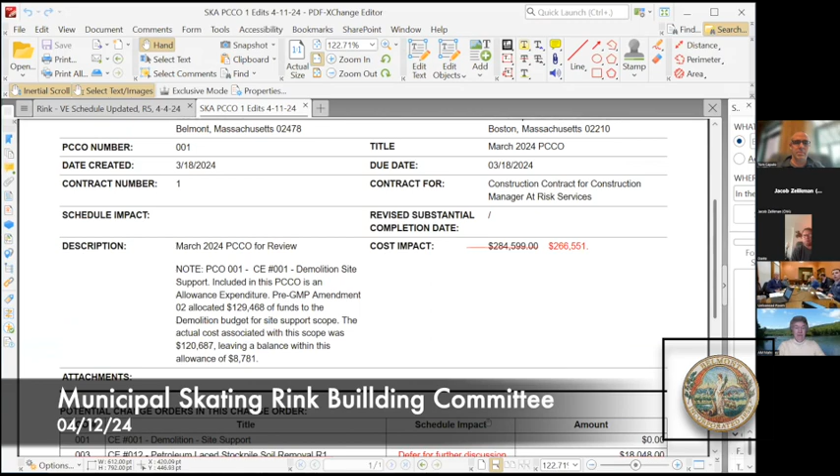All right, so I just described items 1 and 4 on the PCCO. Item 6 is where I'm going to go next, just to get the other ones off.

So this is what we've talked about for the additional abatement that's unforeseen. We've discussed in previous meetings that the rink slab itself, the actual ice surface and the concrete underneath it, the underside of that had a black mastic between that and the green insulation board. That was identified, tested, and determined to be hot, so we had to do a non-traditional work plan to remove that material.

So that material was all stockpiled separately. It was witnessed by a third-party hygienist. It was hauled off to a disposal facility and ticketed and documented. So essentially, the justification of this change order is...

...a pre-agreed upon unit rate that was included in the contract documents for the premium related to disposing ACM concrete, meaning asbestos-containing material, concrete that has to be removed as asbestos-containing material. So that's all a tonnage. This PCO is essentially the verified weights of the concrete disposed of as ACM multiplied by the previously agreed upon unit rate for disposal of concrete as ACM above and beyond the quantity that we were told to carry.

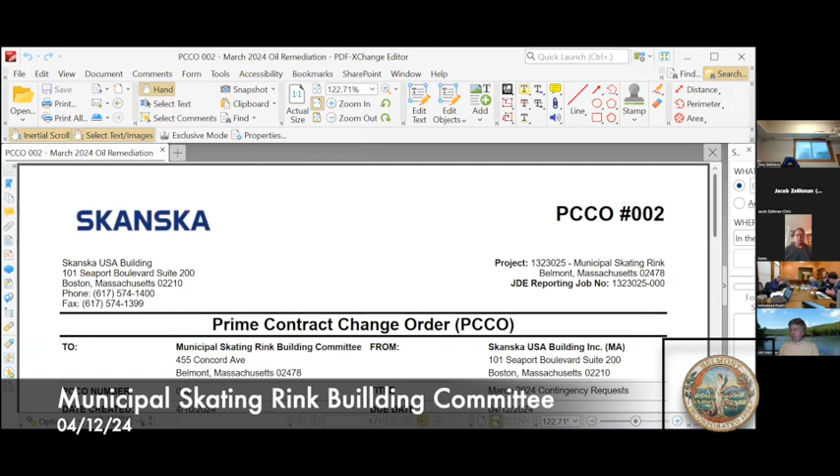Skanska and JDC have contributed to this, so it's not... we've heard your concerns and we understand, and we're looking to resolve this in the best way. And the town is part of it also, because the town is coming up and paying for the $18,000 of

soil disposal, correct, which is oil contaminated. And there was definitely old oil there in the trenches that we dug up. Yes, so the town has some responsibility also. We can get into the details in a future meeting, but that's a big part of it. When we were there digging, and I don't want to speak for the professionals that were there, but what I heard and what I witnessed was a black, thick, viscous oil.

And my understanding from the professionals that were there is that's oil that's been there for a while. That doesn't happen in a week, that doesn't happen in two weeks, that happens over a long period of time. And that's what we saw when we responded: the black viscous oil coming up through the slab. It wasn't red, new fuel oil. So that's why it's a little gray.

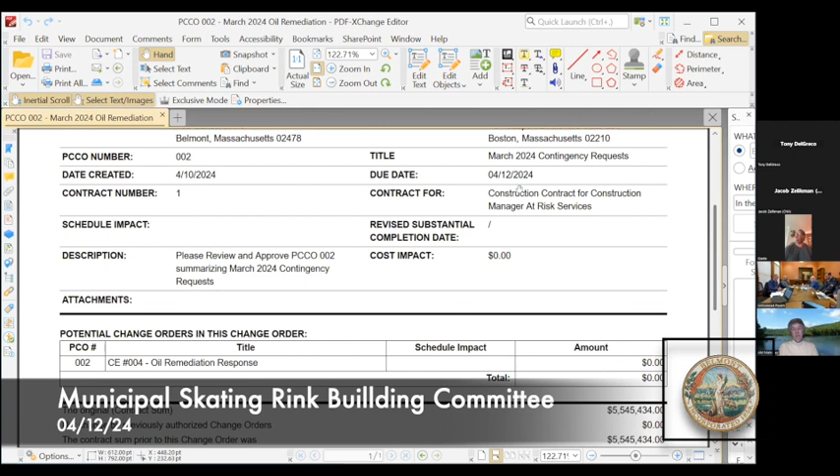However, we're looking forward to coming to some sort of agreement that's fair for everybody, and this was a first attempt to get there. So, well Mike, you're looking for... the town has absorbed $18,000 of it. And your recollection and my recollection of being at the site might be slightly different, but maybe we could talk about that in depth at another time.

I thought we were tabling this discussion, but since it's on the table... No, Dante, please, we are tabling this. I just wanted Mike to give an overview, and then we'll bring it up at our next meeting to approve a change or not approve it, all right? It was just giving the committee a summary of where we are at right now, all right?

Okay, sounds good. It's essentially the $80,000 of emergency response and the $18,000 of soil disposal, so we're at almost $100,000. Okay, so the discussion is tabled, correct? That is correct. Thank you.

Will not be a vote on that today. Mr. Shea, William Shea, does CHA recommend approval of this? Not at this point in time.

Okay, thank you, so that's tabled. Got it. All right, that's all we have for Skanska and billing today, correct, Mike? Yes. Okay, all right, so let's jump to the VE discussion.

Based on last week's meeting, we approved the color on the sides of the building, which is stripe. And TGAS is going to be creating drawings that show where those stripes are, the width of them, so that the pre-engineered metal building can be ordered.

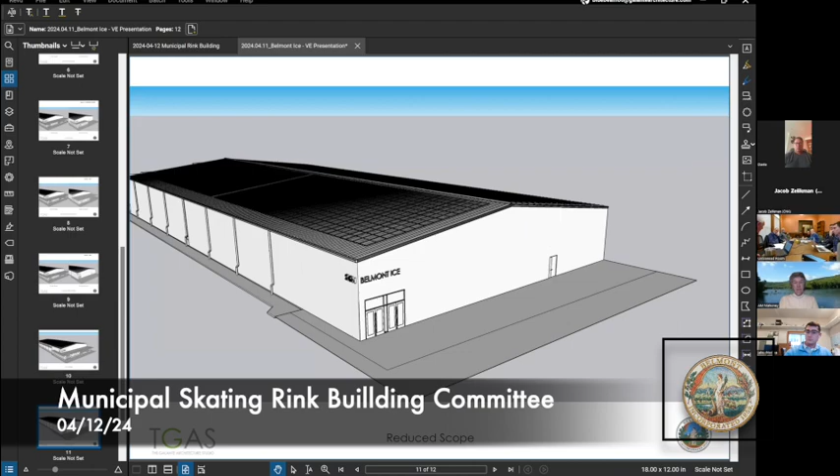I think Ted indicated those would be out imminently. The other is we have modified and defined where the metal building comes down. On three sides of the building, it's coming down at around 19 feet, 8 inches. That will be on the west, the north, and the east side, and a portion of the south side, which the south side being where the lobby is. Around the lobby will still remain as a block as opposed to the cement board.

And those drawings will be out the first next week so that Skanska can then finalize the buy for the building, because then the panel heights will be defined so you can buy it. Is that correct, Mike? Correct.

And in that, the transom windows on each side of the building, east and west, will be included based on the vote of the committee last week. And that will be shown on the drawings that TGAS will be producing.

And the third one that we approved was to keep the roof as galvalume color, in other words, not colored. And that will also be shown. I think LeMessurier will be providing drawings for the change in the concrete stem wall and the foundations for that to make this all happen, and that they were issuing that today.

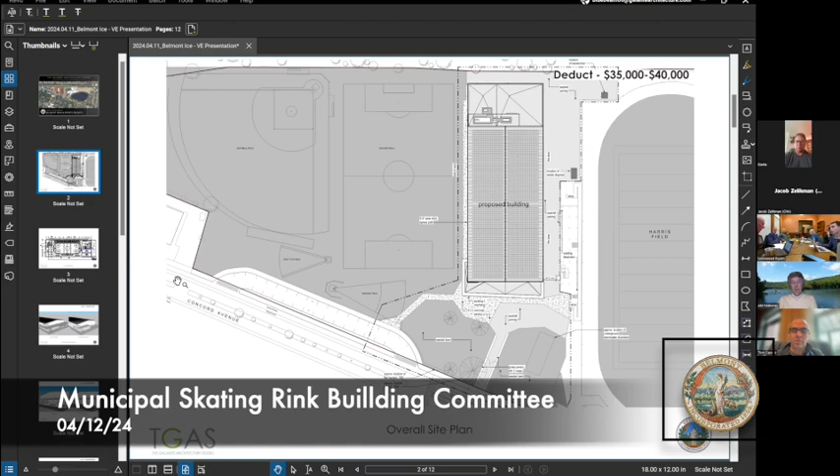Okay, any questions from the committee? Not hearing any? Okay, so now Dawn or Jake, can you bring up the list of other VE items? Ted is sharing. Ted's got it, and then we'll turn it over to Ted.

Good morning, everyone. So we have continued discussions on value engineering, and any decisions we can make will help move the project forward in any way possible.

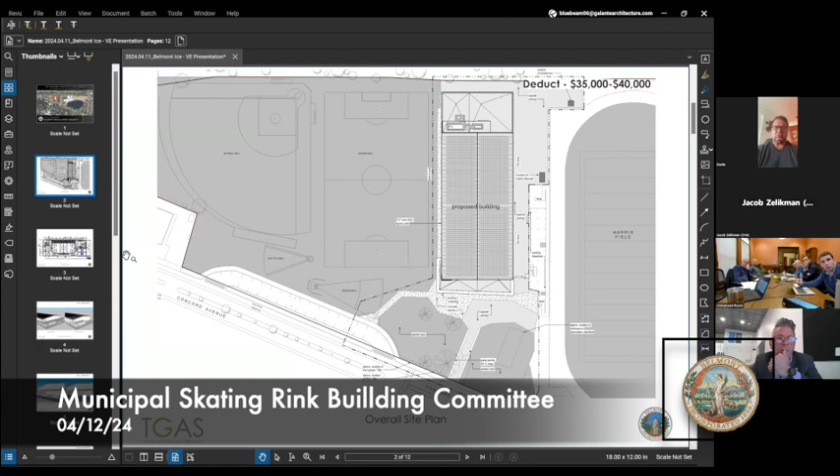The site plan, as we know, shows the building sitting on the site. Here's the floor plan of the overall building. One possible removal is to take the canopy, the roof, the arcade, over to the right side of the building, off the building, and reduce the scope that way, just having the lobby stay on its own.

And that, I understand, is a $35,000 to $40,000 reduction. We have another version, which is to remove the knee wall that is used as a protective barrier from the automotive traffic and pedestrian traffic out here, and that defines the arcade. That's another $20,000 to $25,000 reduction.

This is really just removing the canopy overhang. It's very subtle in the drawing here, would make a significant difference in the building, but there's no canopy overhang on this portion of the reduced scope, and there is a canopy overhang on this portion. Again, a couple hundred thousand dollar reduction, it seems.

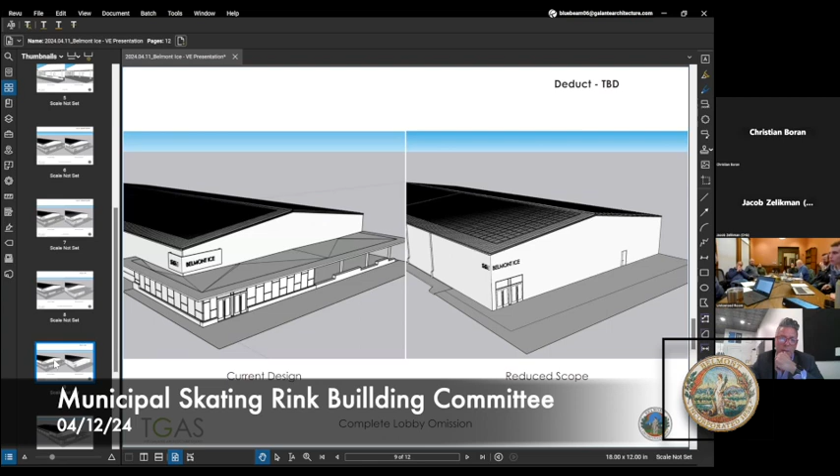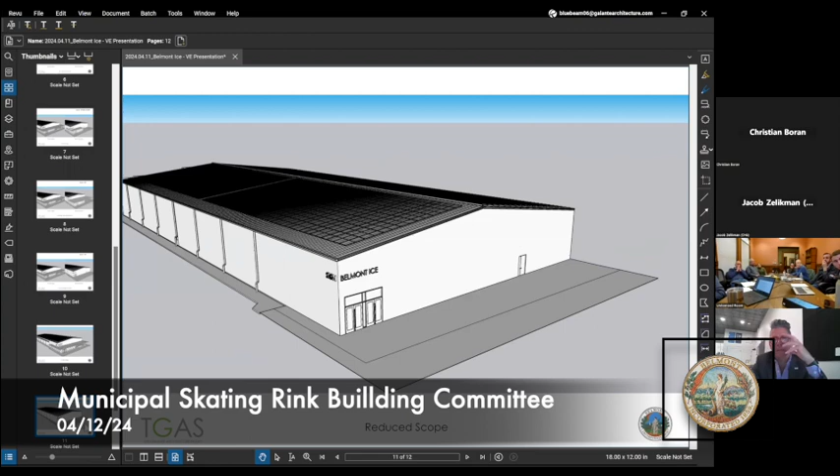Removing the entire lobby is another option, and we're still trying to sort out the value of that item as well. So the current design is looking like this, with some architectural articulation, breaking up the massing and the scale, having some portions open, some portions enclosed, glass and metal. There's a number of thoughts that have gone into that. And the proposed design would be to remove some of those things and reduce the scope.

Okay, so Ted, can I take over from here? Sure. So from the committee standpoint, I don't expect us to come to a conclusion on any of these because we don't have an overall cost number yet. In summary, the independent cost estimate is due today. Skanska and TGAS will reconcile those numbers or costs next Thursday and Friday. The committee will then meet on the 24th, 25th, and potentially the 26th to go through those numbers.

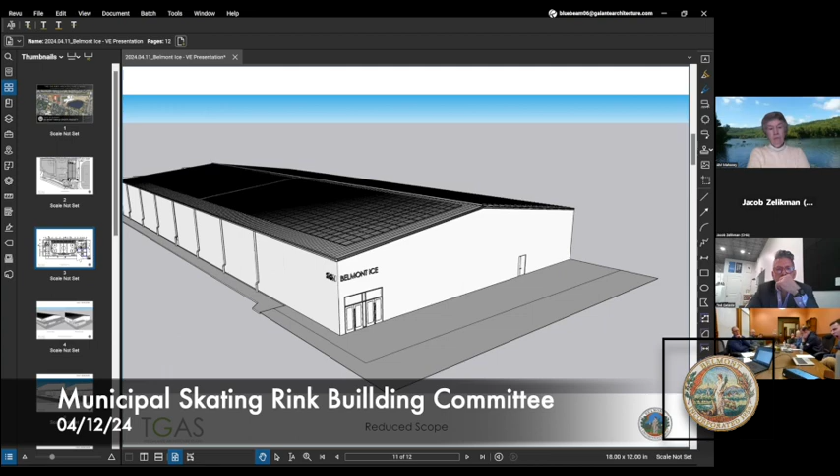And then we'll have a better sense of what value engineering we need to do. However, what we need to do and come to a conclusion on today is to direct TGAS to provide drawings that can be submitted for a permit to the town. So if there are items in this discussion that the committee thinks we should reduce, because we know, or at least I believe, we're going to have a budget issue come two weeks from now. If there are items here that we think we don't want shown on the permit set of drawings, we ought to do that now. Or we just leave it as is and put it in the permit as is, and then amend the permit as we remove some of these items.

Mark, Dante, Anne Marie and Dante, in that order, have their hands raised. Okay, so Anne Marie was first.

Anne Marie: Thank you. I'd like to start with some global questions. My preference would be to just submit these plans as they are, and remove things later if we have to. But here's the more global issue. I think we noted last week that our money problems were not the building — our money problems were other pieces of this project. So let me ask the following questions.

Have we had an opportunity to pursue Belmont Light and the water department for their services? Let me just answer that — that is under discussion, Anne Marie. Okay, we don't have a resolution yet.

All right, good. I understand that we have been tasked with including in our project the locker room space that was in the White Field House, because the high school building committee was not able to complete that. However, can we go back to them and ask for any money they might have left over, to start to cover the cost of our assuming responsibility for their locker rooms?

And then finally — and I know there are people on the committee and in the community who will go crazy when I make this suggestion — can we defer the addition of the PV panels on this building to a later time? What would be the cost of waiting? My understanding is that we can add those things at any point, and perhaps we need to put the PV panels off until we have additional funding to cover them. Those are my thoughts. Thank you.

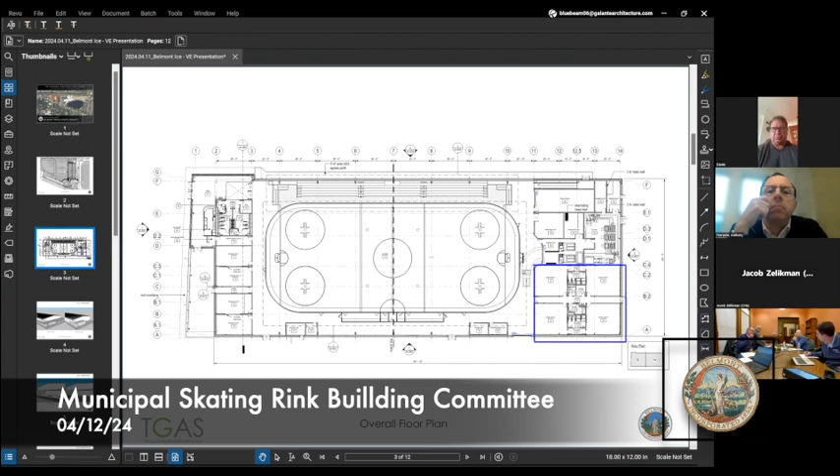Thank you, Mark. Ted, for next meeting, could you have a sketch that shows the removal of the overhang and the removal of the wall that's under the open area, but still keep the open area covered? Keep the arcade. Get rid of the overhang and the canopy.

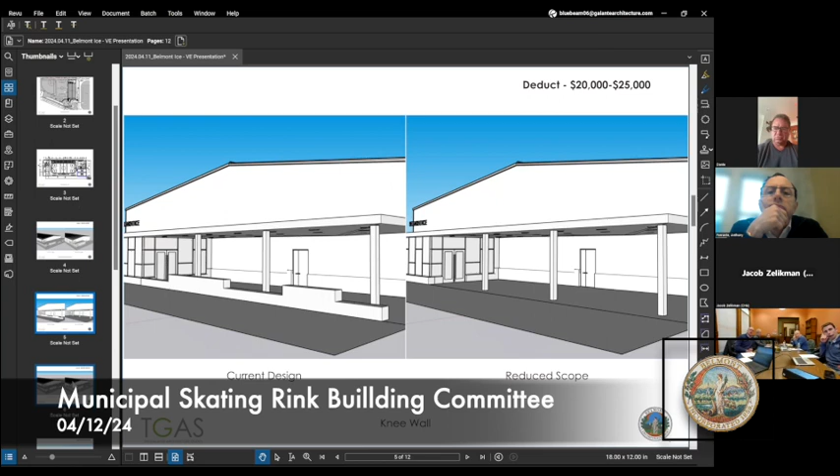The arcade is still there, the wall is gone, and the canopy is there. Okay, and the bump out is still there on the west side also? Get rid of the lower wall, the picture on the right without the lower wall. Thank you.

When we talk about the bump out on the west side, we talked about it in two phases. One was to remove it only from column line 2 to 3, bringing it up to where the corner of the rink is in this figure. Then you take it from column line 2 to 1, which is what Ted was showing in his drawing. It was a two-step process and a two-step elimination, not one.

The reason you can take it out from 2 to 3 is that we still have not resolved how to support that roof, and it's a cantilever. Everyone on the committee needs to understand there is a column coming down in that lobby space supporting that overhanging roof. The high bay roof, that column comes down in the middle of this lobby. Doesn't work very well, it's 8 feet into the lobby area.

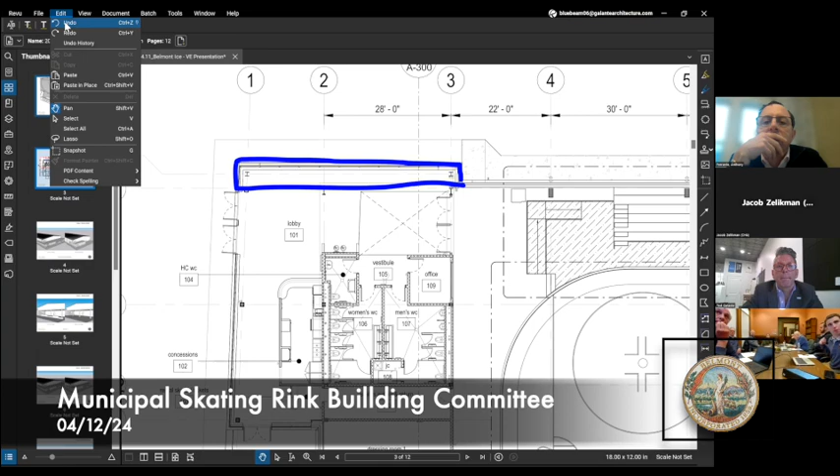What we're talking about is eliminating all of that space — no, that's not true, Ted, we're only eliminating from 3 to 2 first, because column line 2 is sitting in the middle of the lobby. In discussions with the structural engineer, I don't know why they didn't put a column at column line 2 on the F line, so you did not have to have a cantilever coming off this building to support that roof along column line G.

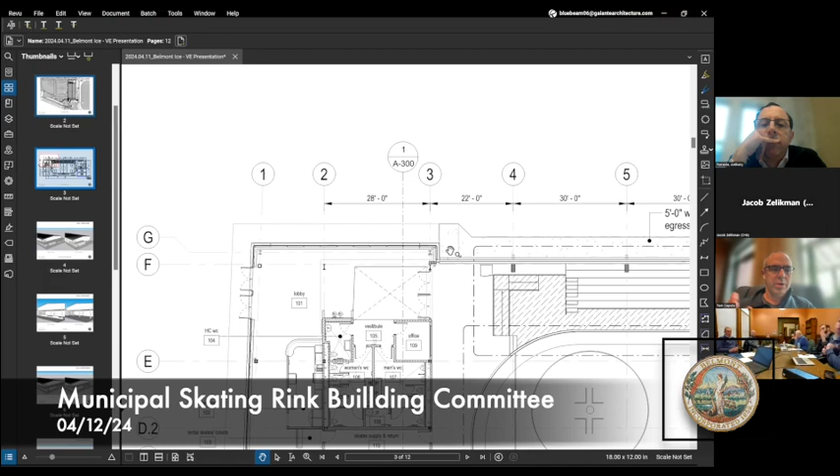Do we have a breakdown of the difference in savings related to the bump out removed from column line 2 to 3 versus from 1 to 3? We don't have that yet.

Danelle had her hand raised, and then Anthony is online. One thing quick on the 2 to 3 — that is more of a simplification that we probably were going to see in this process anyway. I think it just wasn't ever fully resolved, and I think it'll continue to be fleshed out.

In any of these options we're looking at, are there any that impact timeline or the metal building that we should consider today? That's one of my questions. And then, channeling my Tom Caputo — I would like to preserve everything, but as we did last week, are there some things we need to take away? For example, the knee wall to me is a cost savings, a second one is probably the canopy, about $250,000. Things that aren't really affecting the program. Do we need to put our best effort forward on at least some of these things we're communicating to the town, so that when we put this all together in a few weeks, we can show what we tried to do and what we offered up as our best foot forward? So those are my two things.

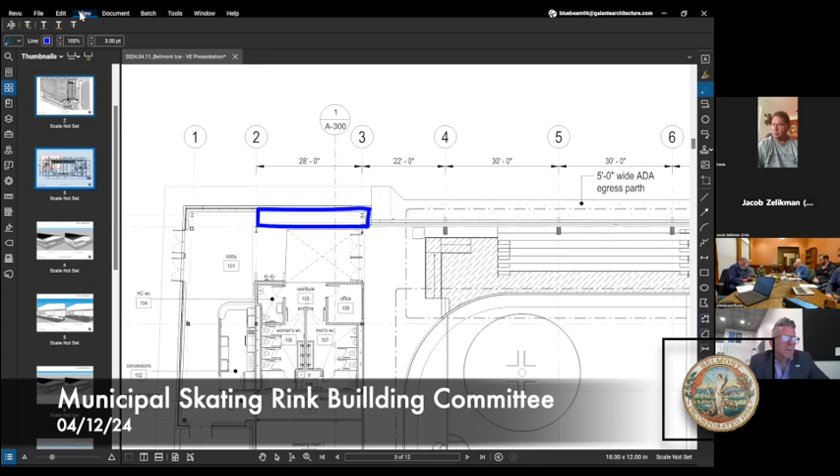Motion to get rid of it? Yes. Yes. Okay. Bill Shea, yes. We'll go backwards on this thing. Steve Saylor, yes. Dante Mazzioli, yes. Meg Moriarty.

Same. Anne Marie Mahoney. Sorry. No, I was just gonna say, I agree with Anne Marie. It's that the other things you were talking about, the benches and all that require upkeep. So, yeah, I'm gonna abstain on this.

Okay, that's fine. Anne Marie Mahoney - gonna stay consistent, and this would be the one thing I could lose, but I'm gonna say keep it in and submit as we are.

Yeah, okay. So Ted, that will mean that will be eliminated from the permit set. Okay, the larger one now is the canopy. I guess I would suggest we leave that in the permit set, but right now it's misc metals, and I'd like to get some more input from Skanska. So when we get to the 26th, if it gets removed, hopefully it doesn't impact the metal building, because I think it's only an add-on now with misc metals and the covering above and below it. Is that fair?

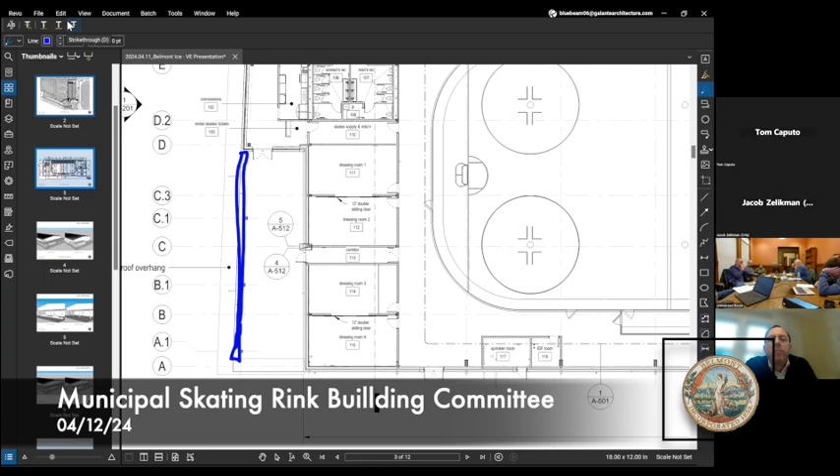So this is the canopy. I think the motion, or the decision needs to be that we come up with a solution to post-install this system. And however it comes, whether it's cold form or misc metals, whatever, from the metal building person, you have to buy the beam that runs along the top, along the parapet of the roof, that it all connects into. So we're buying that under the permit set and under the building.

So it can be added later or deducted later, but we'll still end up paying for that beam. Is that fair? I honestly don't even know if you'd be paying for that beam, because I think the original intent had some of the canopy in it. So this revision was going to be taking scope from the metal building contractor. Now we're just replacing it, probably reducing it to frame out what will come later.

Sure, but what I want to do is make sure we can order the metal building and get the shop drawing done for it. I don't want to speak for Ted and Christian, but I think there's details in the architectural set that summarize the intent you just outlined. So if the decision is we're going to proceed with that intent for now, that gives us time to move on the metal building and get that process moving.

The two things are: one, the metal building getting the shops done, and two, getting a permit set done. And it sounds to me that's the simpler way to do it. If you're going to carry it in the metal building, then we'll carry it in the permit set. I think that makes the most sense from a committee standpoint. Do we agree? The metal building supplier is also supplying the stick-built steel for the front of the building.

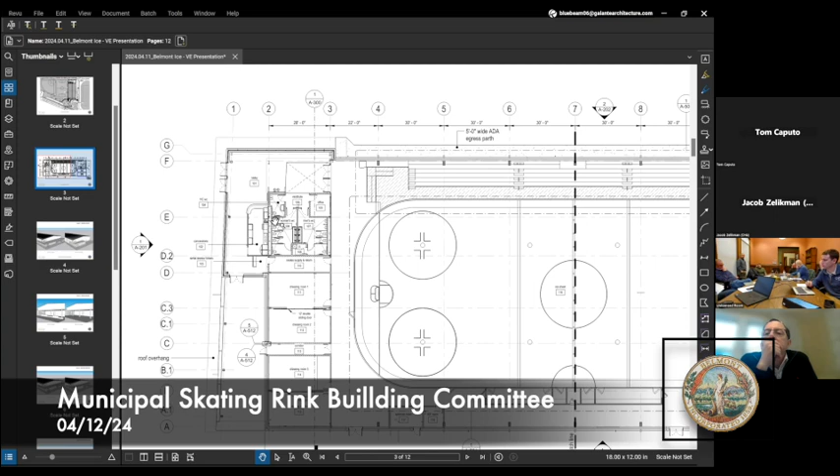Yeah, I mean, the north end of the building faces the tracks. We're concerned, but not as concerned with the aesthetics of it. This side faces the street, the new gorgeous library building, and is adjacent to a new gorgeous school building. We don't want it to look like a dog, so from a design perspective we need to think carefully about what we do here.

I can detail a flashing detail on a weekend, that's not the issue. It's about how the building presents itself for the next 50 years. What we're building is a 50-year structure, and that takes time. Thinking takes time - lopping something off, adding a column, those all have impact. We're trying to preserve some sense of design as we go forward. So it's not about a flashing detail, it's about thinking what the building looks like for 50 years.

I think, unlike the north structure - I'm sorry, Mike Morrison - unlike the north structure, we don't have metal panel here. So there'd be a completely new condition because it's above the storefront if we didn't have the canopy, right? So to Ted's point, there'd be a different material likely introduced to get that done, which I don't know what that looks like. But the most recent drawings had that canopy connected to a parapet wall in that tube, above the storefront.

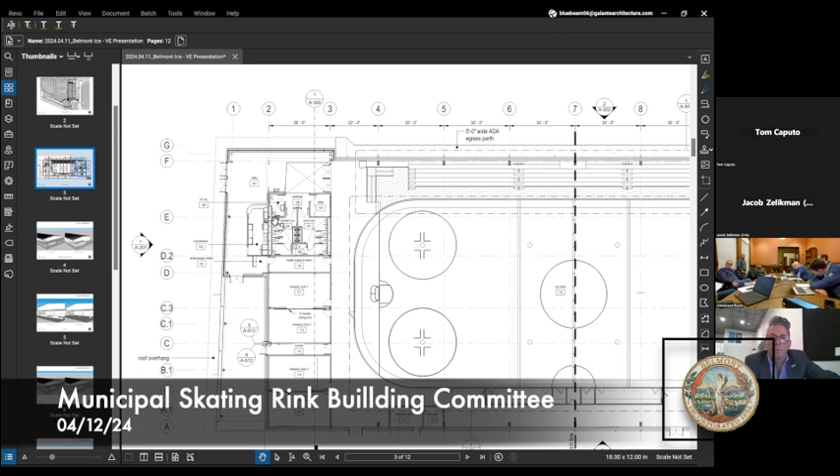But it will be the first thing that comes out on the 24th. Can you restate the polling question? The polling question was: do we eliminate the canopy at this point in time, or - what I'm hearing from Skanska - it doesn't impact the metal building, so it doesn't impact the schedule.

Ted, it doesn't impact his drawings to get a permit set out. That's why I'm suggesting we leave it in for now so we can get the permit set done. If we want to take something out later, it's much easier to remove it from the permit set than to add it back in again.

That makes sense? Yes. So Danelle? So yes, but I will likely vote to remove it later. Okay. Dan? Alston?

I'm not sure if the vote is to keep it in for now. Is that the question? Keep it in the drawings for now? Yes, that's correct. Okay, yes. Anthony has his hand raised, I'll get to Anthony in a second.

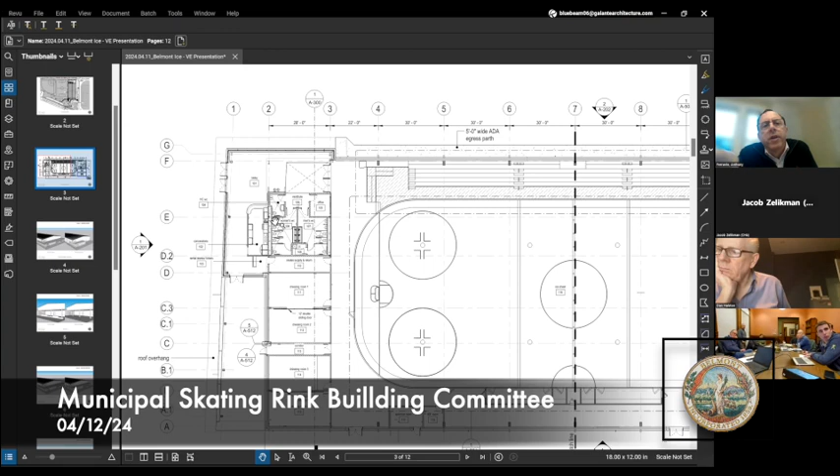Anthony: Yeah, I'm a yes to keep it in, but I was wondering if we could show the slide that shows the canopy with no knee wall. I think it exists, so we can see this is what we're looking at, right? Hold on, that's the design. Hold on, no, I gotta find it. I don't think it exists. This is the closest. The knee wall would be this piece, and that would go away.

Okay, I'm a yes to keeping it in for now. Okay, Tom? Caputo?

Yes, Mark, I guess I'm a touch confused. I think at the end of the day this is an opportunity for value engineering that doesn't impact the program, and I do think it will make sense to take it out. If the question though is we have option value and we can keep it in for the permit set, then I guess that's fine. Is that what you're trying to get alignment on? That's what I'm trying to get to, exactly.

Okay, in that case, I'm trying to do as little changes to the drawings as we can so we can get the permit set out. In that case, I am supportive of the path forward with the expectation, or with my support, for it coming out in the future.

But thank you. Okay, Frank French? Yes, I would say for those reasons we'll keep it on for now and probably have some further discussion on it.

Okay, great. So Ted, I think the only thing the committee is directing you to do is remove the knee wall, and the rest is in the drawings for the permit set. And it would become VE after we have the dollars for various other pieces. Is that fair, Ted? Yeah, makes sense to me.

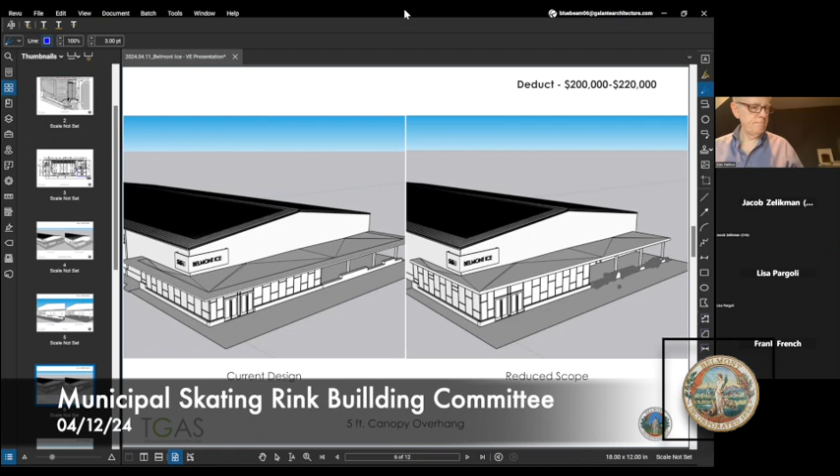My first question was, when you talked about the $100,000, was that the delay? What was the delay on that? And was it what you were talking about previously, where you weren't getting the information and documents back in November, and it was costing almost $1,000 or so a month? So I'd like to know why there was a delay that's costing us that money.

And my other thing, I don't know if it's a question or a comment, but it seems like a no-brainer. If you have to be looking for money elsewhere and then have to go back to the town - after we haven't even got the influx of all those debt exclusions and overrides - to ask for more money, then there's a big problem. And if you want to do that instead of making the cuts, I think that's huge, to come back and think you can just ask for money. So I think that's something to think about, because I thought that was outrageous. We're already in that process. The high school's killing us already, and they've tacked it on to you people. We shouldn't be paying for any of this stuff, sports complex or anything.

Thank you. If you could answer my first question, I'd appreciate it. The first question is because the pre-construction services for Skanska have extended, they need to transfer money from what would be in their general conditions back into this pre-construction era.